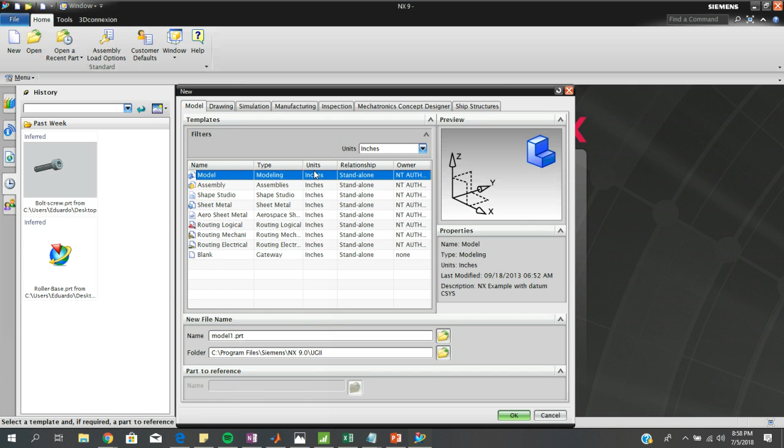For this, we're going to be using assemblies. We're going to put 'roller assembly', and then just select a file. I'm going to use the same file that I've been using for my pieces that I keep on my desktop, so it'll be this one. Hit OK, and I think we're good to go. It's in inches, so we're good. Hit OK, and there we have it.

As in the beginning of it all, when you open the assembly program, it's going to ask you for parts. So it'll be as easy as going into this file, open, and then you can look it up on your computer. It's on my desktop, and right here, roller pieces.

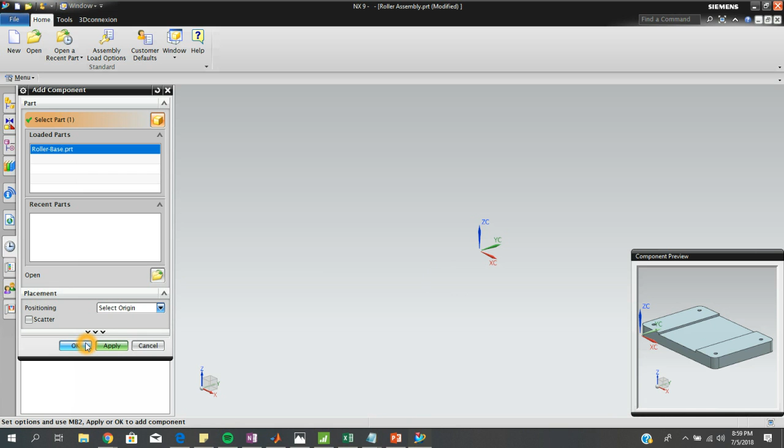Then we want to start with a good base, so let's do the base honestly, it's the beginning, just the way that we build stuff. So I hit apply, we select the coordinate system, I'm going to just put 0, 0, 0, which is this point right here, and then hit OK. And that's going to be my origin, and there's my base.

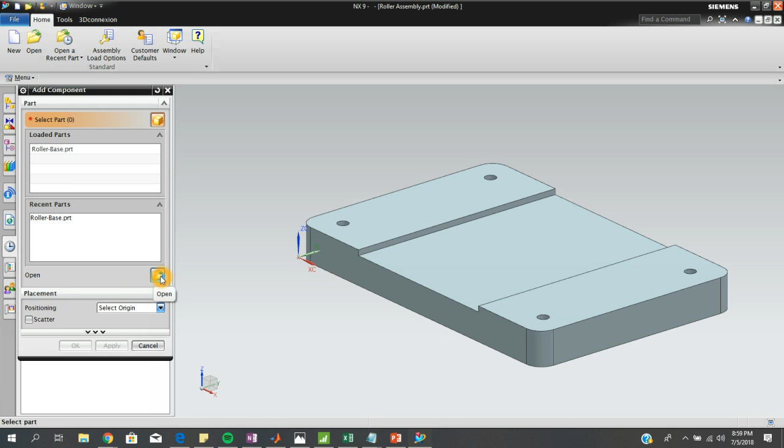This window will keep open, so just hit open again and it will pop up the window with the folder that we pulled. So the next thing that I'm going to put is the holders.

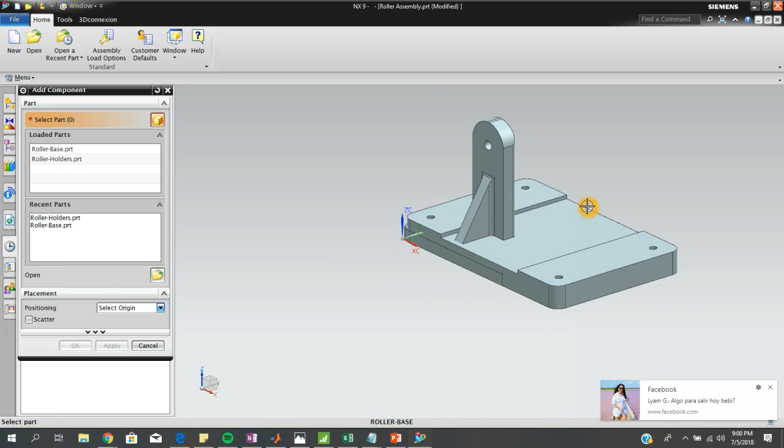Hit apply, and I'm just going to put it right there. I'm going to show you guys the way that I typically do it. I'm good, I can hit cancel for now.

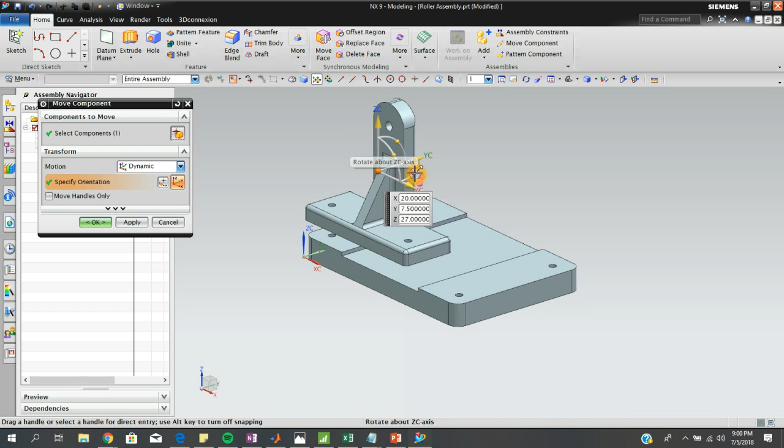I'm going to left click this piece and select this feature right here, which is move, and it's going to bring up the datum plane. You can pull in every direction. I'm just going to pull it up, and then turn it into this axis. I always try, before doing constraints, to put the piece as close as possible to where I want it. And honestly, that's good enough right there, that's where I want it.

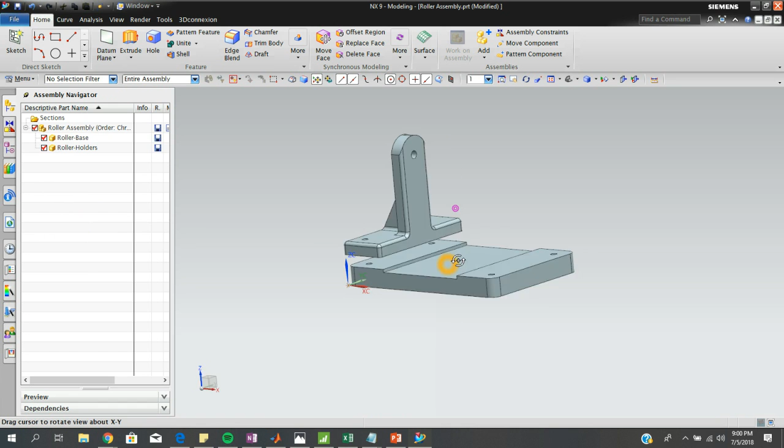So I hit OK, and there's my piece. When I want to pull the constraints, I'm going to go to my home feed, go to assembly constraints right here, and it's going to give me different options.

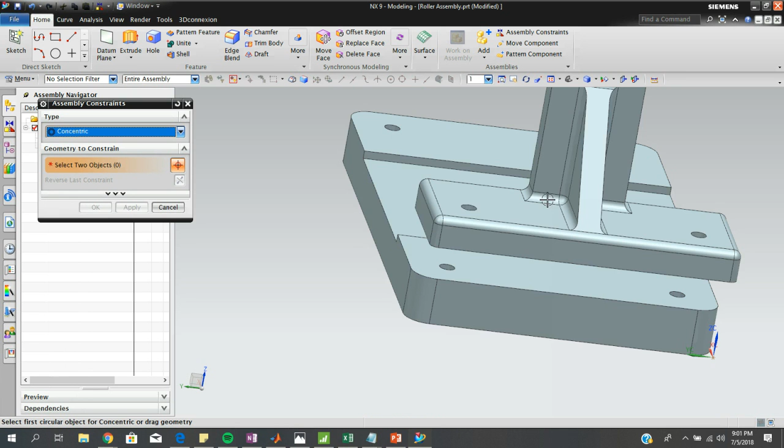The first option that I want to do is touch align. Honestly, no, I'm going to do concentric with this, which is this one. I'm going to select this surface, this sketch, then select the inner part, which is that one. As you can see, it already merged the two objects.

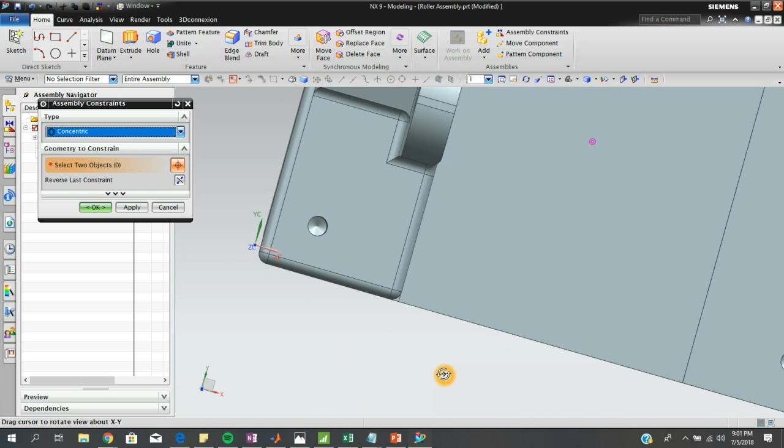I already had it pretty nicely lined up, so it lined up with the second hole as well. If you want to be really specific, you can do two holes that way, to have a better assembly.

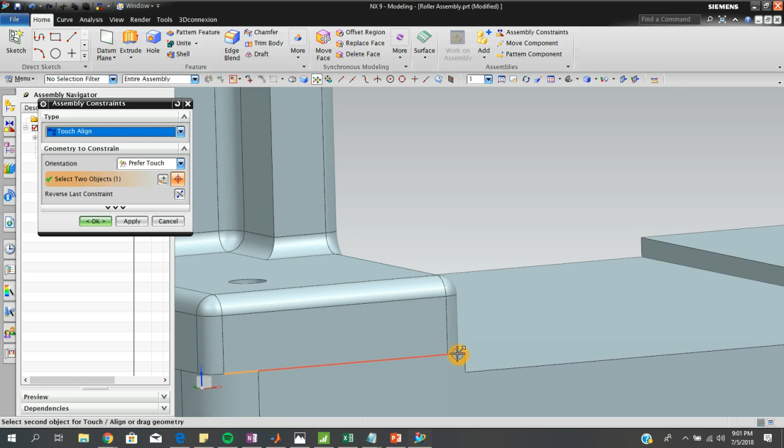Just going to do another one, touch align. I'm going to select this face with this, select OK. That way I'm making sure that the piece has constraints with the base itself rather than just the holes. So there I have it, I have my first holder.

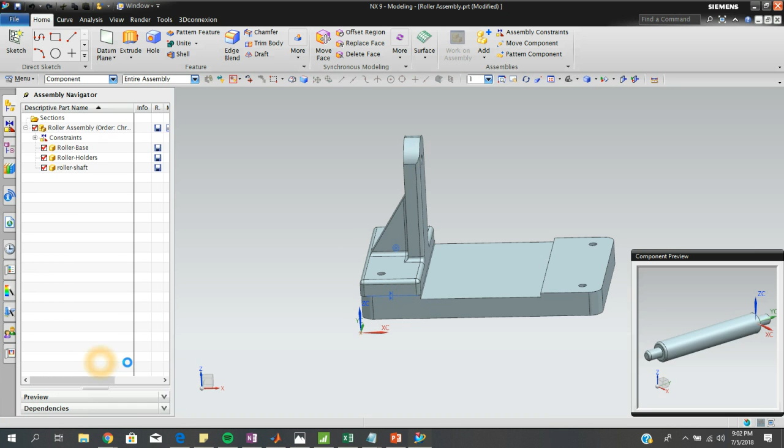Let's do the shaft. If I want to add another piece, I just do add. Same thing, pull the folder, and let's do shaft. Just hit OK, and again it'll appear at my origin. I'm going to do the same thing.

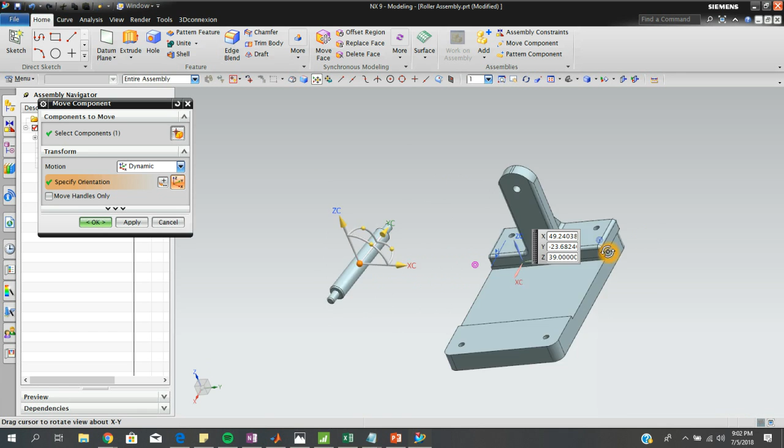Left click, move. I'm going to move it this side, move it up, move it in this direction. Sometimes turning the piece itself really helps, because sometimes we don't get a good feel of the 3D space. So that's good enough.

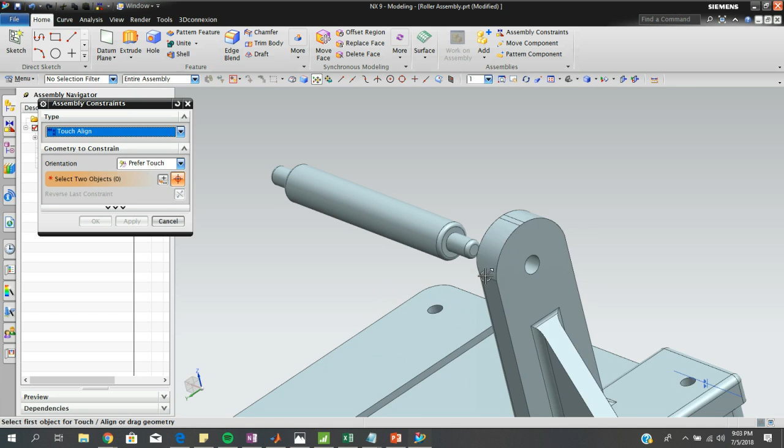I'll leave it right there, and we can just go ahead and do the assembly constraints. For this, I'm going to do concentric as well. I'm going to select this edge right here with this edge. There it goes, it's really automatic, and that's good for now.

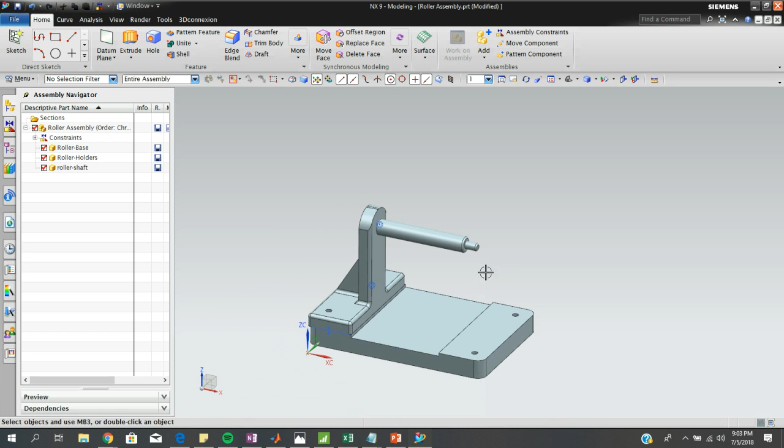Cool, next thing that we can do, and I'm pretty excited about this one, is the roller itself. So I do add, get the folder, the roller, which is the round piece, select OK. Origin, that's OK, I'm going to select move again.

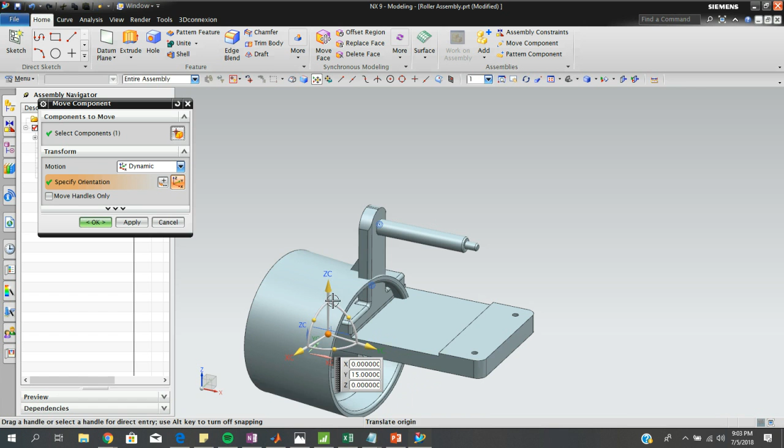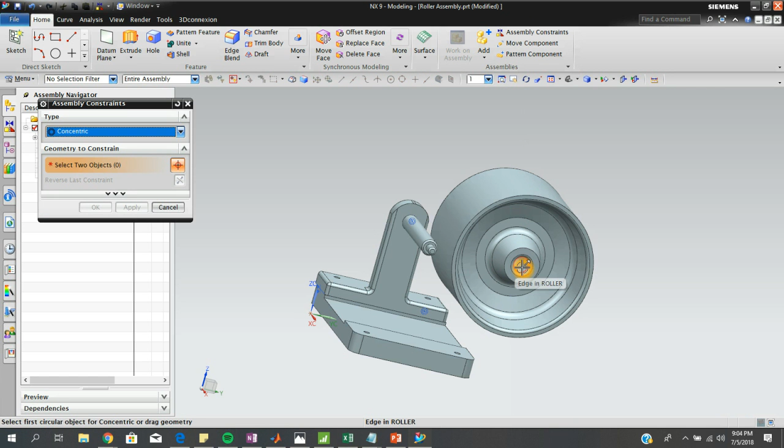Or we can move it to the side. I think that's better. Select OK. So for this one, again, assembly constraints. I'm going to select concentric, and select this one. There we have it, it's looking pretty good. Select OK.

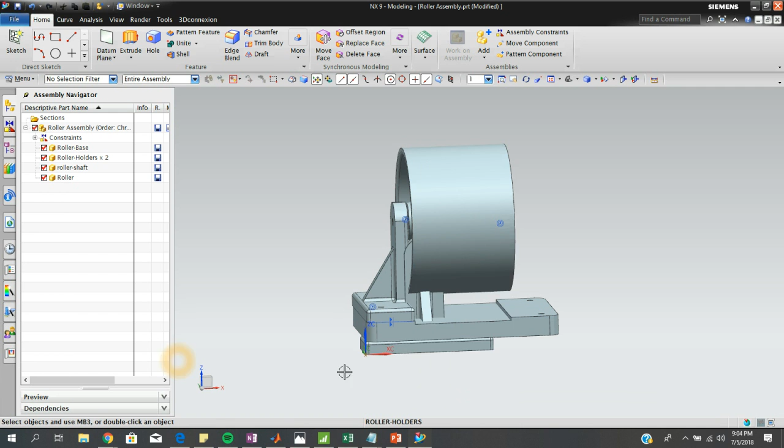Let's add the other holder. Select apply, OK. Left click, move. Move it this direction, up, and make it turn to this side. Yep, that's good, okay.

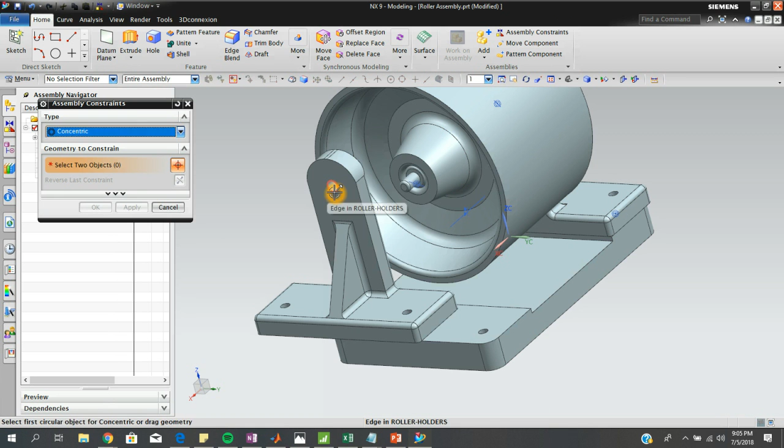Then we could do concentric with this and this. That's good, but as you can see, it's not right. So I want to actually touch align, this edge with this edge. Oh, it's actually giving me an error.

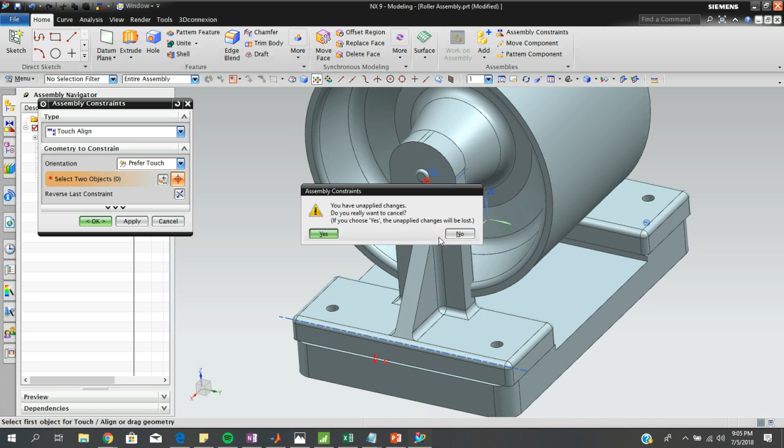So every time you do that, you can just select yes, and it would erase everything, or no, and it goes just to your constraints. Everything that is in red is wrong. So we can delete that last constraint we did, and I'm going to delete the other one as well. It's good for placement though, so I'm still happy.

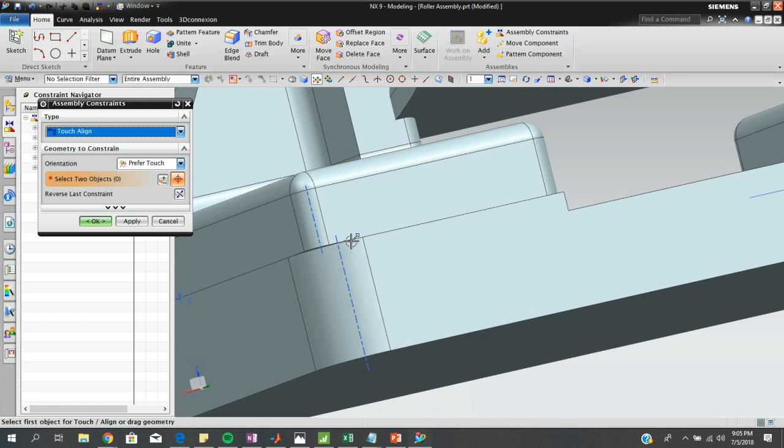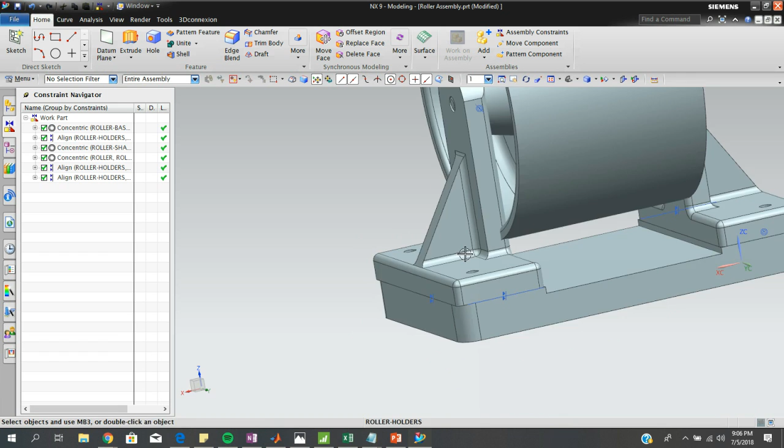I'm going to do touch align, that way I'm making sure that my base is where I want it to be. Actually, I undid that, so let's do it again. I'm going to select this border with this border. Select OK, there I have it. It's where I want it to be, and that looks pretty good, honestly.

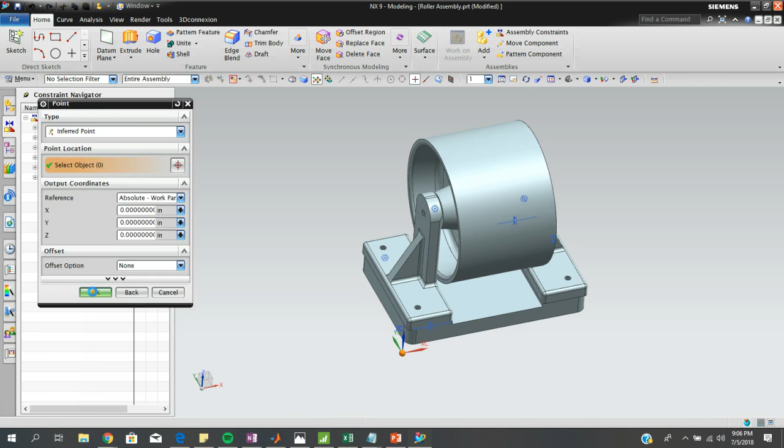Cool, so the thing that is missing are the screws. That should be relatively easy. So let's go again, screw, select OK, and OK, there's going to be my first screw. For this one I think we're good, let's just put the concentric. Select this one, I'm going to select this one. There we have it, we have our screw already in place.

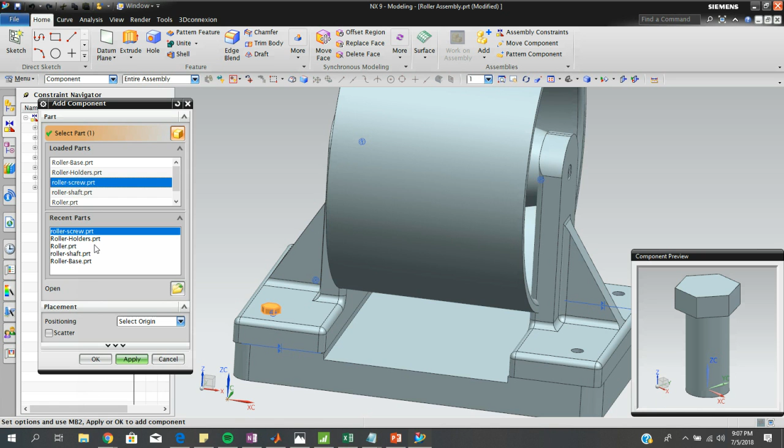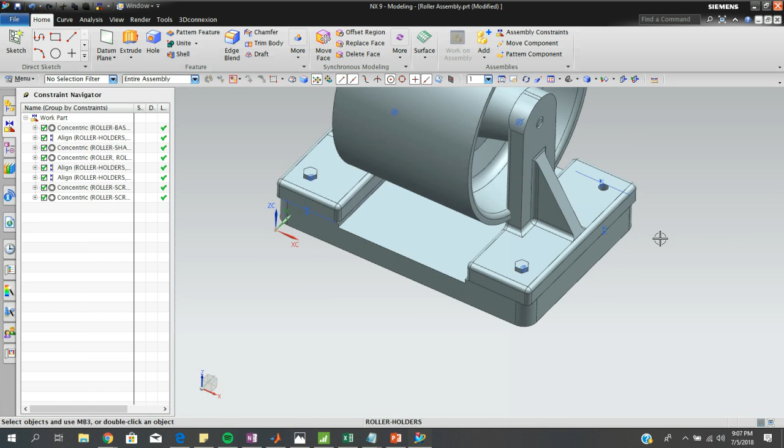Okay, and I'm going to add the other 2 screws. Assembly constraint. It's really important for you to zoom and select the face or the edge that you want. It's really important, sometimes constraints could be really difficult in that sense or manner.

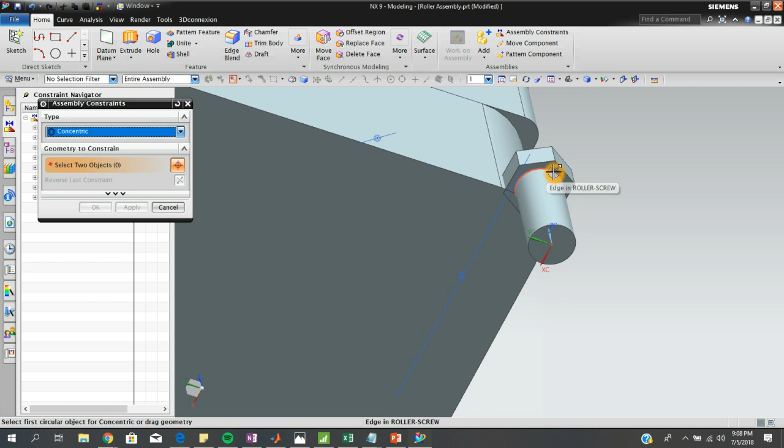Two screws. Select OK, I have it. Select this edge right here. Oh, I have to put the assembly constraints. God damn. And this face right here, and that's my other screw.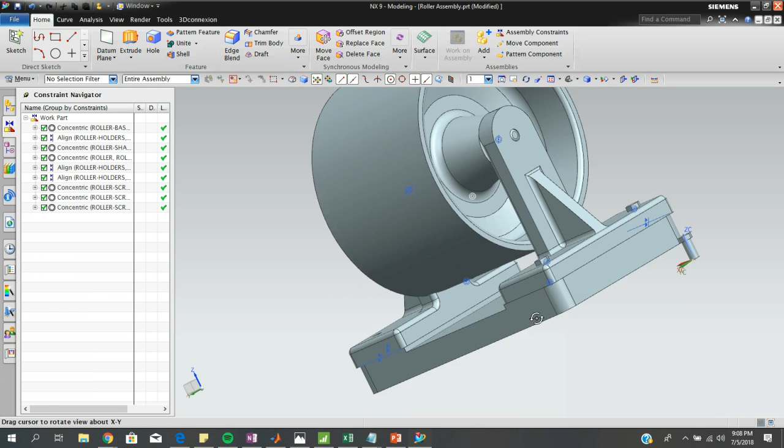The other one, I'm still missing one. Add screws. Yep. Pull up assemblies, constraints again. Select that edge, then that edge again, and then select OK. And there we have it, we have our roller within our assembly.

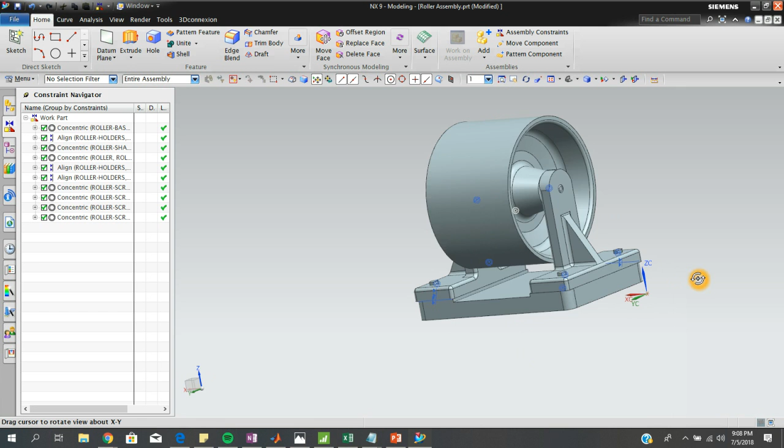So the other two things that I wanted to show you guys were to do cross sections and renders. Those are two key things that you guys can use in NX, and it helps a lot in the design phase. It also helps a lot to showcase different features within the assembly itself. So to do a cross section is really, really simple.

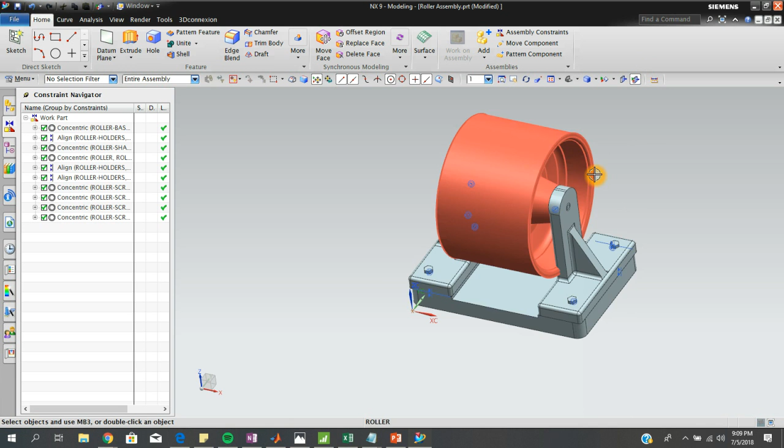There's a feature right here called clip section. You can click on it, and there you go. It gives you different options to do a cross section. You can do different planes, you can pull if you want to see something in specific, and you can see all the pieces all together.

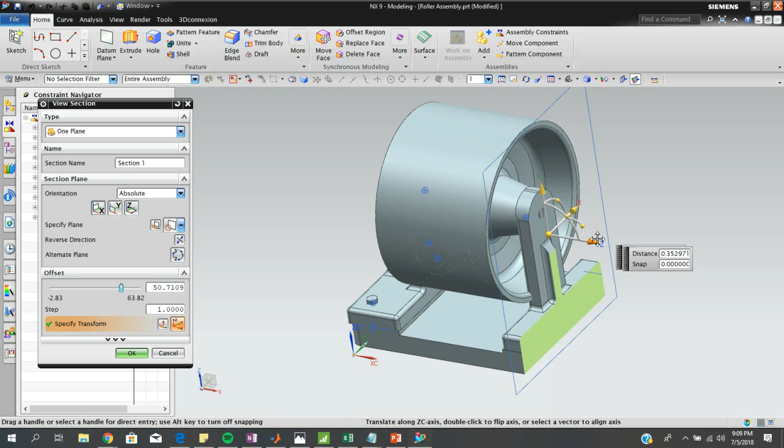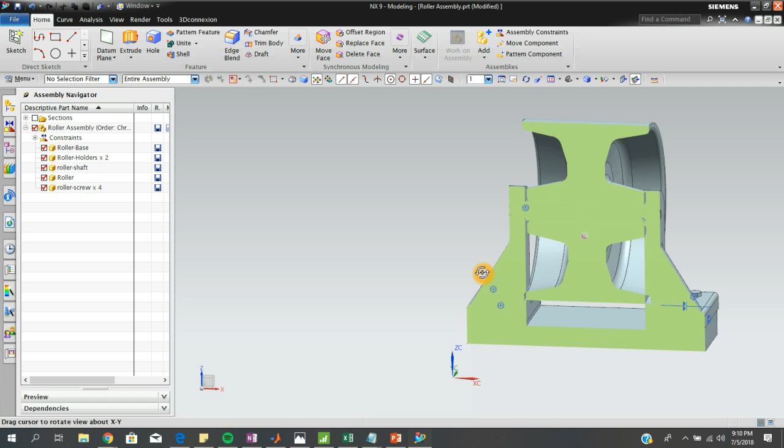So for example, if I'm really interested in this one right there, honestly, select OK, and there's my cross section. That is a nice cross section of our assembly. So that's really good. Okay guys, so for the next thing, if you want to undo the cross sections, just hit here, and then you have your whole piece again.

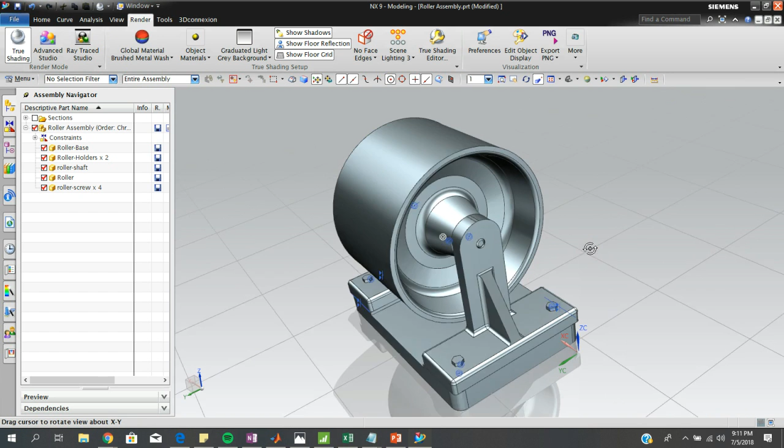So yeah, and then for the render, it's really easy. Just go to render. If you want a quick render, you can just go to true shading, and it'll give you a really nice chrome kind of shade to your piece. It can serve as photos or exhibitions for the different things that you want.

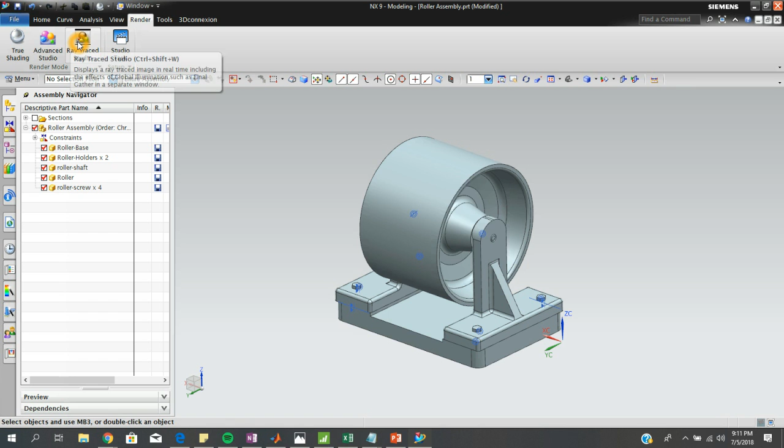But the render that I really like is not this one, it's the Ray Traced Studio. It gives us a really, really good render. It typically takes more time to render, but here's the complete piece, and it's really good, honestly. Every time I move it, it has to calculate everything again, but it's a really good render and it looks really realistic. So yeah, you can take a picture of that, or you can just download it, and then you have a really nice picture of your assembly.